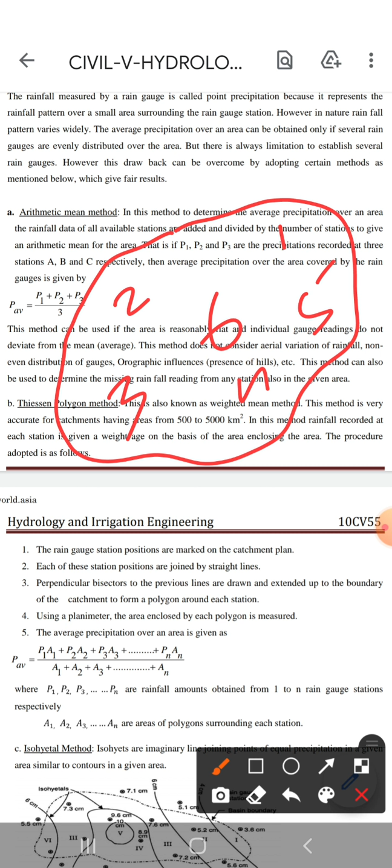That rainfall will be designated as P1 at station 1, P2 at station 2, P3 at station 3, P4 at station 4, P5 and P6. Now, to find the average rainfall in this particular catchment area, we have to take the average of all these 6 precipitation rainfall data. So, we will see the various methods by which we can calculate the average precipitation over an area.

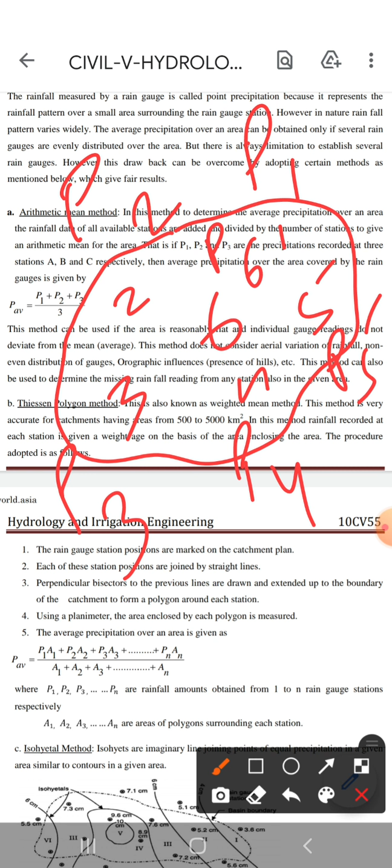Okay, so first of all, the rainfall measured by a rain gauge is called point precipitation. First thing to note here is that the rain gauge measures only point precipitation, not precipitation over an area, because it represents the rainfall pattern over a small area surrounding the rain gauge station. However, in nature the rainfall pattern varies widely.

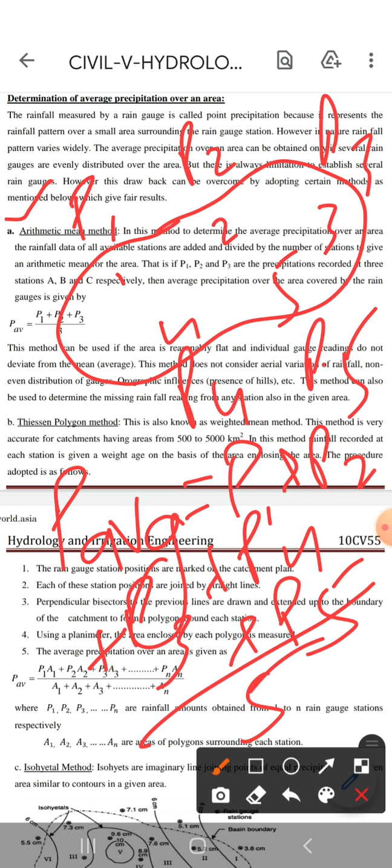Now we have to find the average precipitation P average over the entire catchment. That should be the sum of all precipitation, P1 plus P2 plus P3 plus P4 plus P5, divided by 5. So we find the average precipitation using the average formula. So this is the arithmetic mean method. Now what are the limitations of this method? This method can be used reasonably in flat and plain areas. First limitation is it is used in flat and plain areas.

Right. And individual rain gauge readings do not deviate from the mean. Okay, this method does not consider areal variation of rainfall. This point is very important. Areal variation means in some area it is less, in some area it is more. So it does not consider the areal variation of rainfall, that is, non-even distribution of rain gauges.

Okay. This method can also be used to determine the missing rainfall reading from any station. We will see in the later portion how this method can be used to find the missing rainfall data. Okay, so up till now we have studied the arithmetic mean method, which is very simple. We have studied the limitations also, that this method is used in flat areas. And the next important point about the arithmetic mean method is that this is the constant weightage method.

Weightage method, that means every station is given a constant weightage. It is not that certain rain gauge stations are given more weightage and certain are given less weightage. In this method every station is given a constant weightage, so this method is also called as constant weightage method.

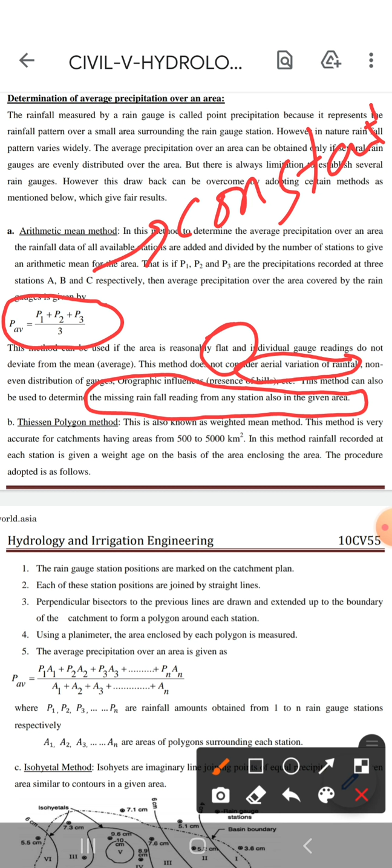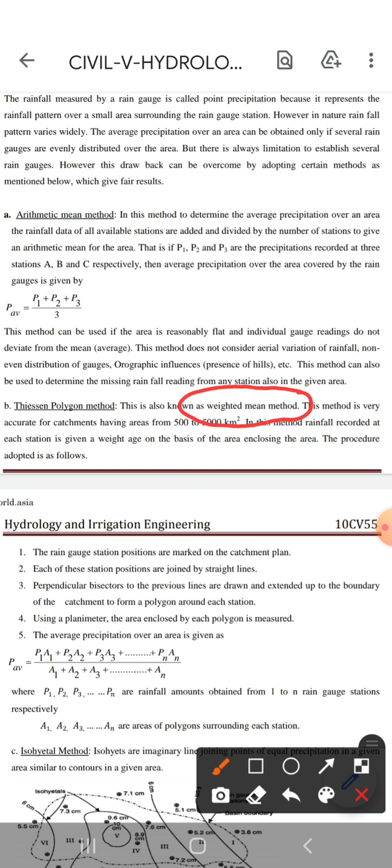Next method is Thiessen polygon method. So first of all we will study what is Thiessen polygon method. So the first point, it is also called as weighted mean method. Certain weightage factors are assigned to a particular rain gauge station. That is why this method is called as weighted mean method. This method is very accurate for catchment having area 500 to

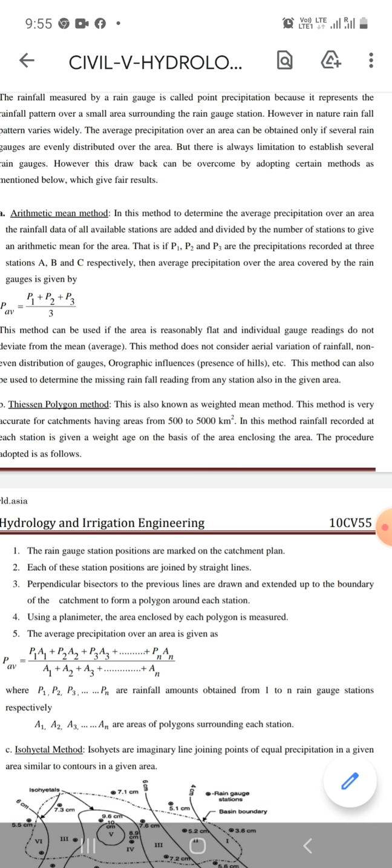In this method, rainfall recorded at each station is given a certain weightage on the basis of area enclosing. Now we'll see how this weightage is given. Suppose this is a catchment area in the triangular form. So there are 3 rain gauge stations, first, second and third. I will draw it again. Suppose there are 3 stations, 1, 2 and 3.

So first of all we will connect all these rain gauge stations. After connecting all these rain gauge stations, we will draw the bisector of each line. So suppose this is the bisector for this line, this is the bisector for this line, and this is the bisector for this line. So all these bisectors are meeting at a point, and a certain area is enclosed for a certain rain gauge station.

So suppose for rain gauge station 1 the area is this, for rain gauge station 2 the area is this, and for rain gauge station 3 the area is this. So suppose this is area A2, this is area A1, and this is area A3. So a certain weightage factor is assigned to rain gauge station 1, and that weightage factor will be A1 upon A. What is A? Total area enclosed between the boundaries.

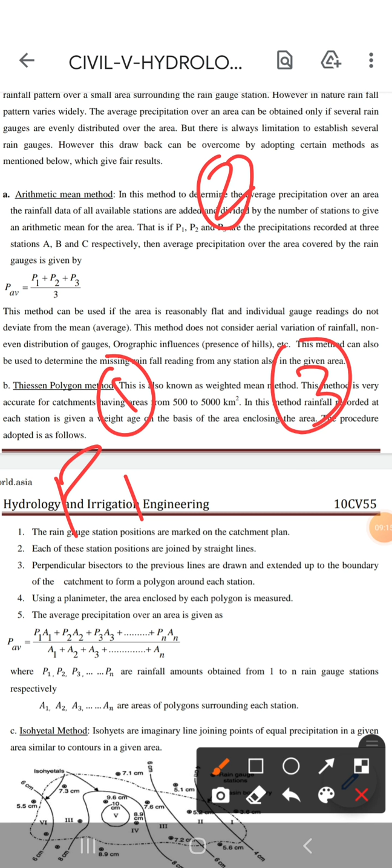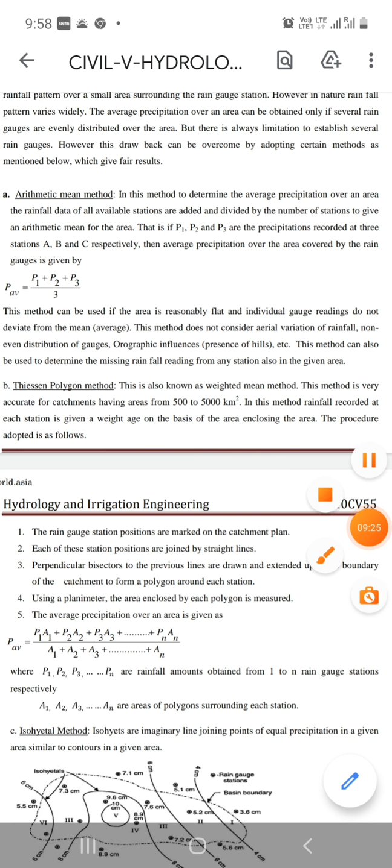Now to find the average rainfall, we have to multiply precipitation with this weightage factor. Suppose these were the rain gauge stations 1, 2 and 3, and the precipitation here is P1, here is P2, and here is P3. So P average can be found out using the formula P average equals P1 into A1 upon A, plus P2 into A2 upon A, plus P3 into A3 upon A. So this is the formula to find the average precipitation using the Thiessen polygon method.

So in the next class we will see the next method, which is isohyetal method. Up till now we have studied only two methods. So in the next class we will study the isohyetal method of measuring the average precipitation over the area.